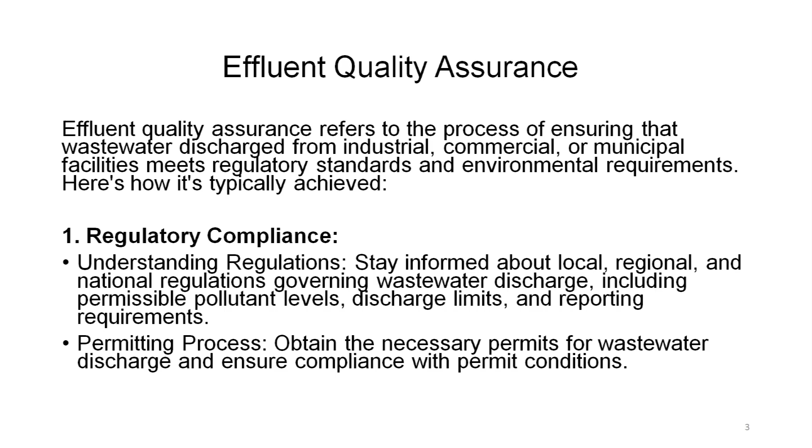Permitting process: obtain the necessary permits for wastewater discharge and ensure compliance with permit conditions. So, we have to understand that these permissible limits have been designed on certain factors. Monitoring and sampling: implement a monitoring program to regularly sample and analyze effluent for various parameters including pH, temperature, biochemical oxygen demand BOD, chemical oxygen demand COD, total suspended solids TSS, nutrients and specific pollutants. So, there should be regular monitoring of all these parameters.

Sampling protocol: follow a standardized sampling protocol to ensure accurate and representative samples. That means the sampling should not be done randomly. Laboratory analysis: utilize accredited laboratories for analysis of effluent samples to ensure reliability and accuracy of the results, because if we analyze the sample at an unaccredited lab, we are not sure whether they have followed the testing protocols clearly and objectively.

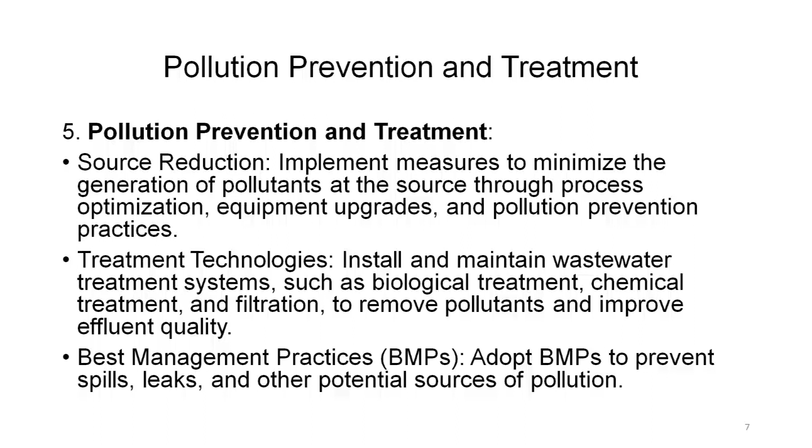Continuous improvement. It is not just one day's improvement. Continuous improvement, performance evaluation: regularly assess the performance of the wastewater treatment system and monitoring program to identify opportunities for improvement.

Benchmarking, that is, compare effluent quality data against historical data, industry standards and best practices to set performance targets and track progress over time. That means you set a certain goal and see whether you have reached that goal or not. That is called benchmarking.

Training and education. Provide training and education to employees involved in effluent monitoring and management to ensure competency and awareness of regulatory requirements. Effluent quality assurance is essential for protecting water resources, safeguarding public health and minimizing environmental impacts associated with wastewater discharge. By implementing robust monitoring, quality control and pollution prevention measures, organizations can demonstrate compliance with regulation and contribute to sustainable water management practices.

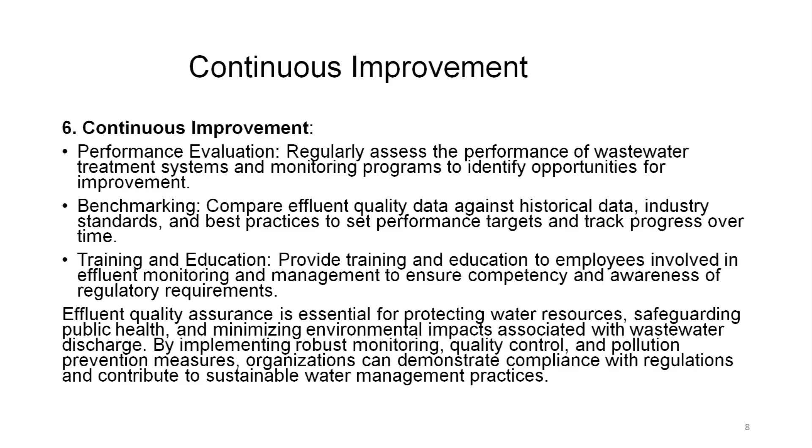So, effluent quality assurance actually assures that if you have a robust monitoring system, quality control can be done, and that can only happen if pollution prevention measures have been taken by the organization, and this has been done according to the regulatory norms. Only then could a sustainable water management practice be said to be in place.

Waste auditing and minimization. Waste auditing and minimization are essential practices for businesses and organizations aiming to reduce their environmental impact and improve efficiency. Here is a breakdown of what they involve. Waste auditing. Assessment: conduct a comprehensive evaluation of all waste streams generated by the organization, including solid waste, hazardous waste, wastewater and emissions. So, the totality of all the kinds of waste that an organization generates from the mill must be taken into account. Solid waste, hazardous waste, wastewater, that is the effluent, and emissions.

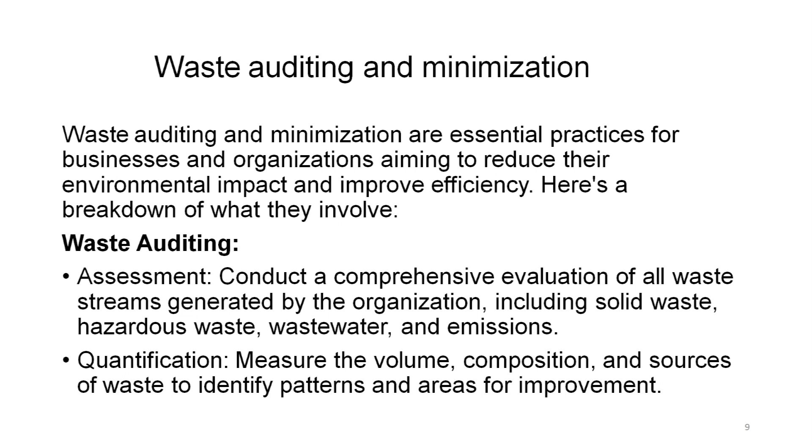Quantification: measure the volume, composition and sources of waste to identify patterns and areas of improvement. Only when we know the quantities will we know how to improve, and that is how we will be able to identify a pattern and design an area of improvement. Waste audit and minimization. Analysis, documentation and reporting. These are three major factors which are the basis of waste auditing.

Analysis, that means analyze the data collected to understand the reasons behind waste generation and identify opportunities for reduction. Only when analysis is carried out will we know where the waste is mainly generated, and when that is identified, we will know how to reduce it. Documentation: document the findings of the audit, including waste types, quantities, disposal methods and associated costs.

So, everything has to be written down. It is not that we analyze and keep the result here and there, and then when there is an internal audit or an external audit from the regulatory bodies, we have no data to be found anywhere. Everything has to be documented systematically, date wise: what were the findings, what was the pH, what was the COD, what was the BOD of that sample. Day 2, again the analysis, the same data has to be written down, and it is better to store all this data on the computer.

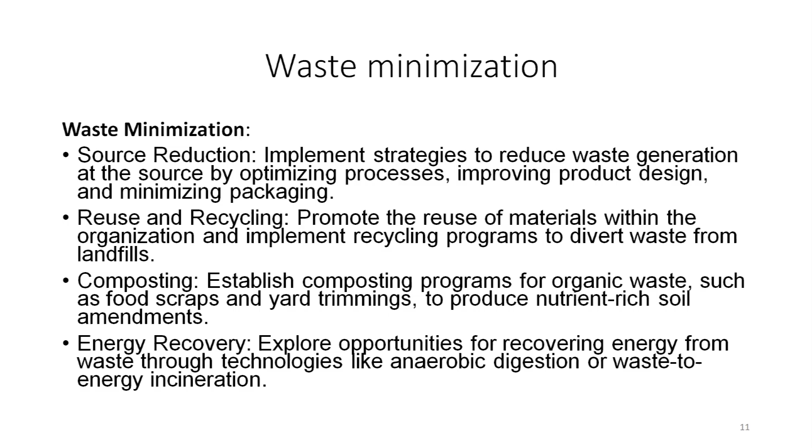Energy recovery: explore opportunities for recovering energy from waste through technologies like anaerobic digestion or waste-to-energy incineration. So, we saw in the previous lecture that anaerobic digestion can give biogas. Now, that is a source of energy. So, we should look for such opportunities and utilize them accordingly.

Education and training: educate employees about waste reduction practices and encourage their participation through training programs and incentives. So, once it is incentivized, people know the importance of why we should minimize the waste.

Supplier engagement: collaborate with suppliers to identify opportunities for reducing packaging waste, optimizing transportation and promoting sustainable sourcing practices. Continuous improvement: monitor waste generation over time, set targets for reduction and regularly review and adjust waste management strategies accordingly.

By conducting waste audits and implementing effective minimization strategies, organizations can not only reduce their environmental footprint, but also realize cost savings, improve regulatory compliance and enhance their reputation as responsible corporate citizens. So, there are many hidden benefits also. If they implement effective minimization strategies, there are bound to be cost savings, and above all their reputation as a responsible corporate house will also be shown.

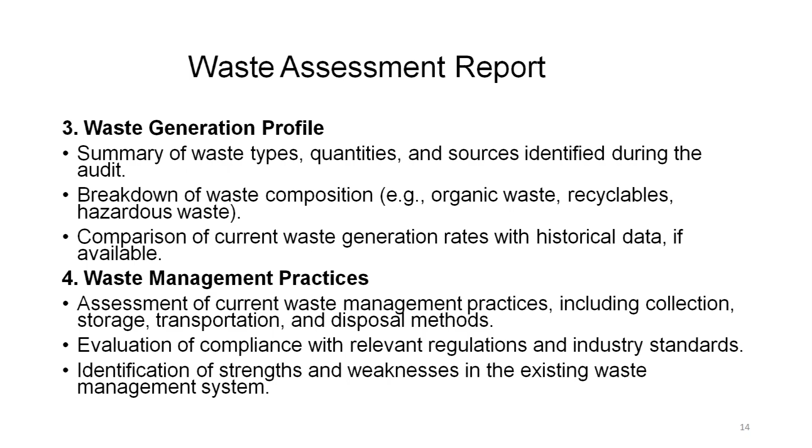So, one has to assess the current management practices, whether they are correct or not, how it was collected, how it was stored, how it was transported, and what disposal methods were adopted. Looking at all this, one can find the strengths and weaknesses of the existing waste management system. Because when we write it down in tabular form, we know where the limits have exceeded, where they have gone down, which process is better and which needs improvement, and that is where one can find the strengths and weaknesses of the existing system.

In the waste management assessment report, environmental impacts also need to be assessed. Analysis of environmental impacts associated with waste generation and disposal, such as greenhouse gas emissions, water pollution and resource depletion. Assessment of potential risk to human health and ecosystems, because that is the primary reason why all this waste auditing and minimization is being done, in order to reduce the environmental footprint.

Cost analysis. Estimation of costs associated with waste management, including disposal fees, transportation costs and labor expenses.

Identification of opportunities for cost saving through waste minimization and recycling initiatives. So, which means that we have to also keep in mind the cost effectivity. We cannot have a remediation plan which is very high in cost. Otherwise, the whole economy or the business model for that manufacturer will fail.

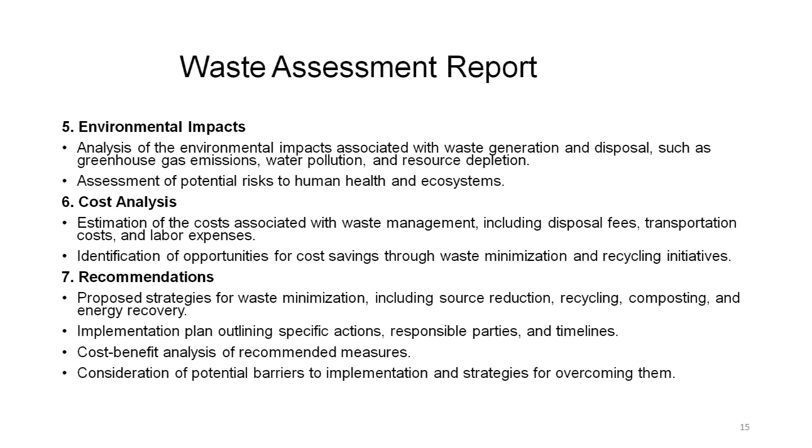And in the end, one has to write in the waste assessment report a conclusion, which will comprise of summary of key findings and recommendation, importance of waste reduction and sustainability for the organization, and call to action for stakeholders to support and implement the proposed initiative. And in the appendices, we will have supporting data, chart, graph from the waste audit, copies of relevant regulations, permits and other documentation, additional resources for further reading and references.

A well prepared waste assessment report serves as a valuable tool for guiding waste management, decision making, prioritizing actions and tracking progress towards sustainability. So, you see that this waste assessment report has multifaceted usage and can help us in making decision about waste management properly, prioritizing which action to be taken first and tracking the progress towards sustainability goals.

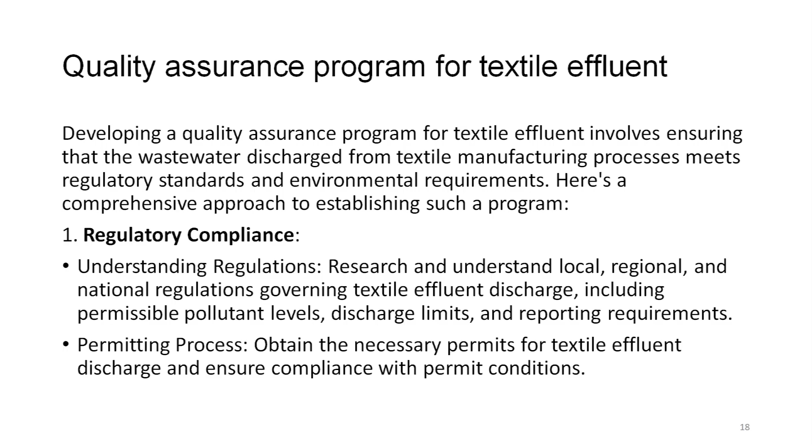Understanding regulation: research and understand local, regional and national regulation governing textile effluent discharge, including permissible pollutant levels, discharge limits and reporting requirements. Permitting process: obtain the necessary permits for textile effluent discharge and ensure compliance with permit conditions. So, when you have brought down the levels to the permissible limit, then permits can be given that yes, now your effluent is permissible for discharge into the local water bodies. So, this is what is meant by permitting processes.

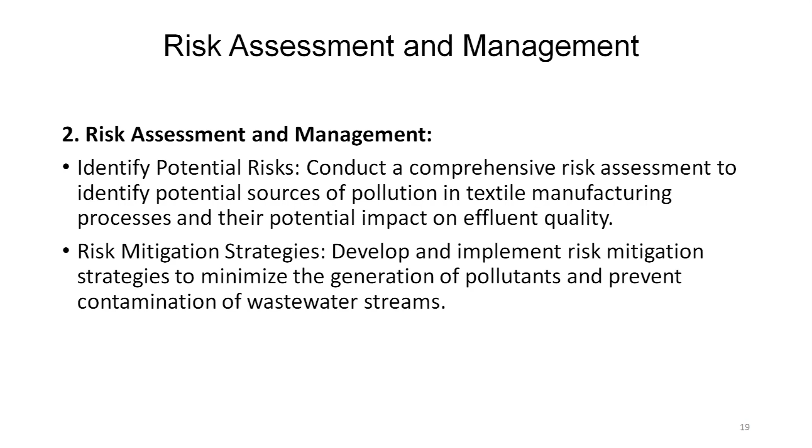Risk assessment and management. You have to identify potential risk. Conduct a comprehensive risk assessment to identify potential sources of pollution in textile manufacturing processes and their potential impact on effluent quality. Risk mitigation strategies then have to be made. Develop and implement risk mitigation strategies to minimize the generation of pollutants and prevent contamination of wastewater streams.

Quality control, monitoring and sampling, because again and again I am emphasizing that regular monitoring is required. Implement a monitoring program to regularly sample and analyze textile effluent for various parameters including pH, temperature, BOD, COD, TSS, color and specific pollutants associated with textile dyes and chemicals. Sampling protocols: follow standardized sampling protocol to ensure representative samples are collected from different stages of the manufacturing process. Laboratory analysis: utilize accredited laboratories to analyze the effluent samples to ensure reliability and accuracy of the results.

Quality control, calibration and maintenance. Regularly calibrate and maintain monitoring equipment to ensure accuracy and reliability of measurements. Quality assurance and quality control, QA and QC. Implement QA and QC procedures to verify the accuracy and precision of monitoring data and laboratory analysis.

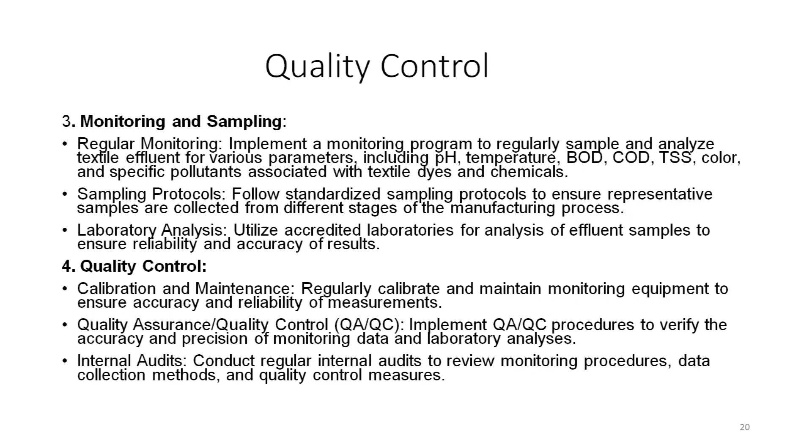An internal audit. Conduct regular internal audits to review monitoring procedures, data collection methods and quality control measures. Only when you do this kind of internal audit, you are able to know what should be the process of monitoring, and once you have the data collected, then you know how to make measures to control the quality to the stipulated standard values.

Pollution prevention and treatment. Source reduction, repeatedly I have told, is very important. Implement measures to minimize the generation of pollutants at source through process optimization, equipment upgrade and pollution prevention practices. If we can reduce the pollution, then managing that pollution can be much easier.

Treatment technologies. Install and maintain wastewater treatment systems such as biological treatment, chemical treatment and advanced oxidation processes to remove pollutants and improve effluent quality. Best management practices. Adopt best management practices to prevent spills, leaks and other potential sources during the textile manufacturing processes and operations.

Employee training and engagement. Training programs should be regularly conducted. Provide comprehensive training to employees involved in the textile manufacturing processes on proper handling of chemicals, waste management practices and regulatory compliance requirements. Employee engagement. Encourage employee involvement in identifying opportunities for waste reduction, pollution prevention and continuous improvement initiatives.

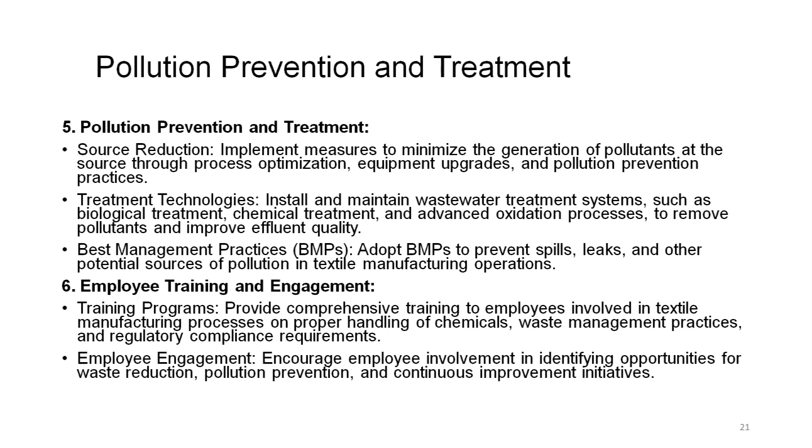So, all this I am repeatedly telling, because I want to emphasize the fact that even quality assurance of the effluent is very, very important from the textile manufacturer's point of view. Continuous improvement: we cannot say that okay, now this is done, there is no scope for further improvement. There is always a scope for further improvement.

So, performance evaluation should be done, regular assessment of performance of wastewater treatment system and monitoring programs to identify opportunities for improvement. Benchmarking: compare effluent quality data against historical data, industry standards and best practices to set performance targets and track progress over time.

Stakeholder engagement: engage stakeholders including regulatory agencies, local communities and environmental organizations to gather input and feedback on effluent management practices and performance. By implementing a comprehensive quality assurance program for textile effluent, organizations can ensure compliance with regulations, protect water resources and minimize environmental impacts associated with textile manufacturing operations. So, it is a kind of a win-win situation if one does this in a more concerted and proper manner.

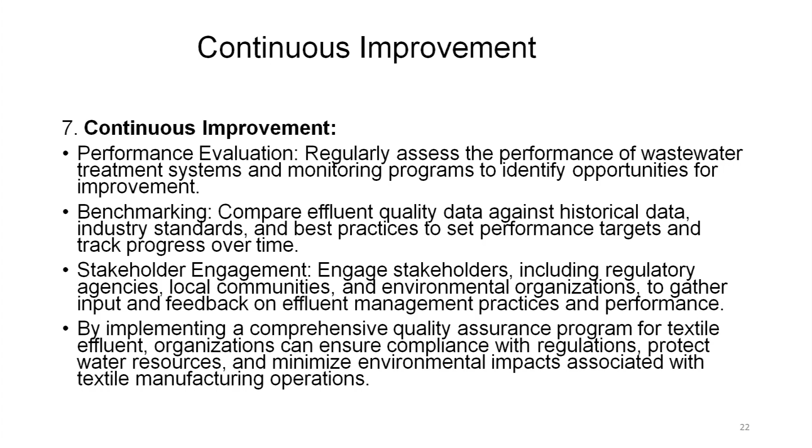So, waste auditing and minimization. Introduction and enforcement of complex environmental regulation have forced industry to regulate the environmental effects and to reconsider their approaches towards waste management. Because now the laws have become very, very stringent and the regulatory bodies are putting a lot of restrictions because the pollution levels are going beyond control. The emphasis in the textile industry is now on improving process efficiency, minimizing waste and optimizing waste treatment and disposal practices to ensure compliance with discharge and disposal regulations.

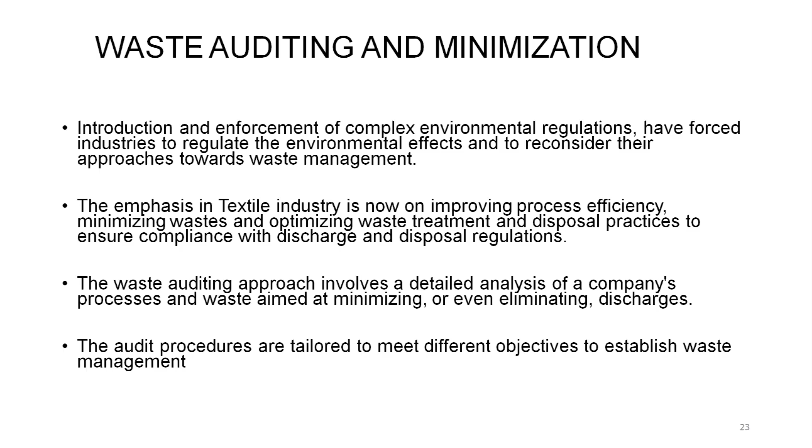The waste auditing approach involves a detailed analysis of a company's processes and waste aimed at minimizing or even eliminating discharges. Well, that is the most ideal situation, that you have zero discharge, and that is what is being told as ZDHC. So, when there is ZDHC, zero discharge of hazardous chemicals, that is the most ideal situation, but that generally does not happen so. The audit procedures are tailored to meet different objectives to establish waste management.

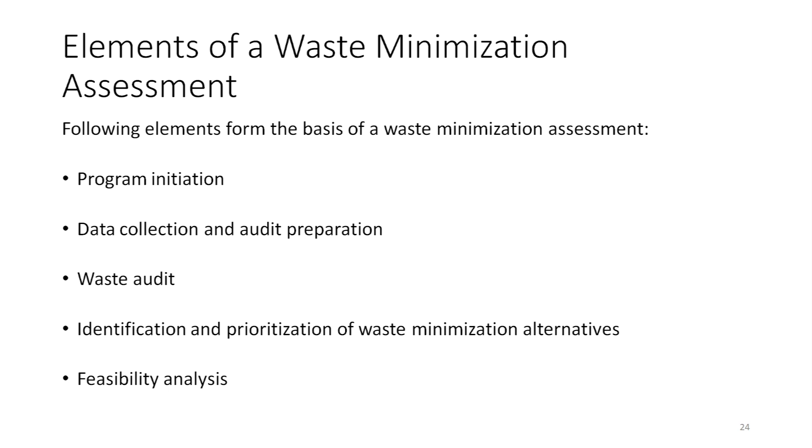Elements of waste minimization assessment. The following elements form the basis of waste minimization assessment. How can we minimize the waste? Program initiation, that we make a program to minimize all the types of waste that are generated during different processes. Data collection and audit preparation. Waste audit, identification and prioritization of waste minimization alternatives, and feasibility analysis. We can make big plans, but whether that will be feasible or not is to be seen, and therefore, we should be responsible to make a plan which is feasible.

Program initiation. The waste assessment team can involve many groups within the company, and therefore, management support and an organized approach are essential to ensure the success of the program. A team leader should be nominated. He should see that the company issues a policy statement and disseminates information on the waste assessment to project the company's commitment to the program and increase awareness and enthusiasm for the program in the plant. It is important to define the goals and time frame for the assessment. You cannot have a timeless program.

Typical goals that would be included in this waste minimization program would be reducing the quantity of waste that is shipped off site to reduce disposal cost and long term liability, compliance with discharge or emission regulations, reducing water usage in processing operations and reducing solid waste generation.

So, these are some of the typical goals. If one focuses on reducing the quantity of waste that is actually sent for disposal, then the disposal cost will come down and long term liability also will be taken care of. If discharge or emissions are within the regulation, then that is one of the best things, and reducing water usage wherever possible in the processing operations is one of the best options.

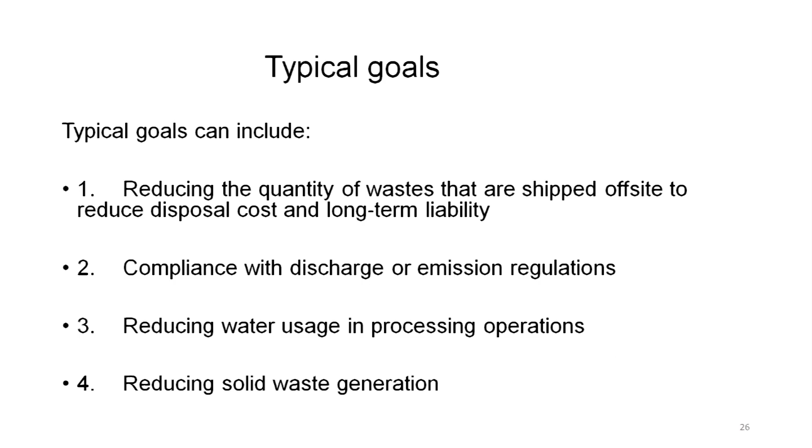Data collection and audit preparation. As a first step in the audit preparation, the audit team should be finalized. The team leader will be put in place and should have a team with collective experience in the following areas. He should have knowledge of all the operations used in the factory.

He should have knowledge of applicable waste and environmental regulations, understanding of potential waste minimization alternatives, and the ability to make technical and economic appraisal of waste minimization alternatives. Unless and until he knows what are the different operations that are being carried out in the factory, he will not be able to make any waste minimization plan.

Unless and until he understands what are the wastes that are generated and how regulatory norms can be adapted to it, it will not work. So, there is a need that such a team should be made and audit preparation should be done in the manner as described.

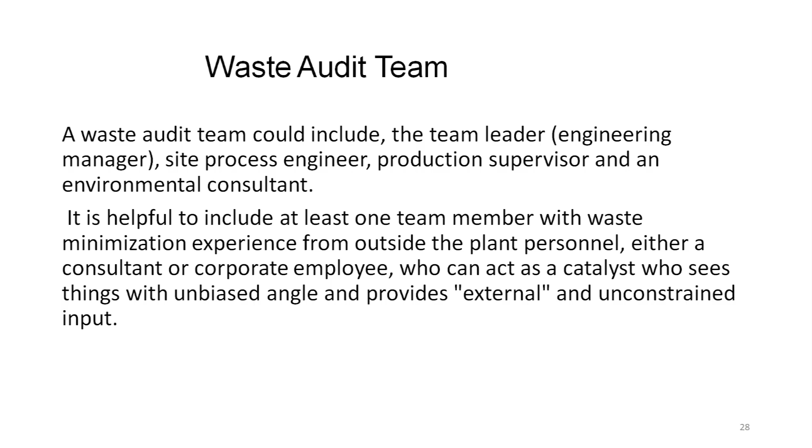A waste audit team could include a team leader who could be an engineering manager, site process engineer, production supervisor, and an environmental consultant. It is helpful to include at least one team member with waste minimization experience from outside the plant personnel, either a consultant or a corporate employee, who can act as a catalyst, who sees things from an unbiased angle and provides external and unconstrained input. So, with this kind of teamwork, the waste audit team can be constituted.